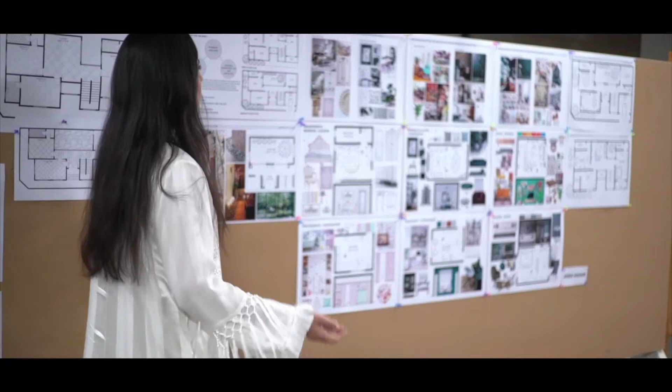My proposal for this conference is intended to be a contribution in the field of design education, practice and research by establishing the importance of adaptive reuse of city assets. The research was initially envisioned as part of a research project, then converted into an academic project and a studio project with students of interior design, architecture, and also practitioners from the field of research, design, and adaptive reuse. The proposal aims to establish the needs of adaptive reuse of city assets and cultural assets.

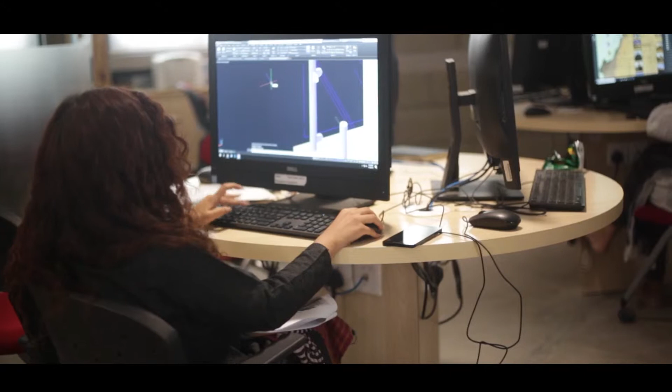This research was initiated as part of an academic exercise, then later converted into a studio project, a design intervention in which practitioners, adaptive reuse experts, students and future designers take part to complete this project. Now this proposal is in the second stage where we are involving the government and the city mayor to see this project as a potential revitalization project for the city of Karachi.

This research touches upon the potentials of adaptive reuse of historic city centers, and how the abundant stock of buildings can be refunctioned to save them from demolition and loss. Before going ahead with the research proposal and showing the kind of work we are doing, I would like the audience to see the rich context of Pakistan and the rich historic character of the city of Karachi.

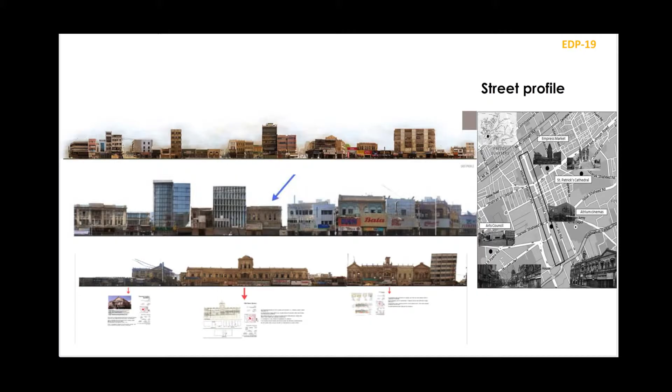Saddar Bazaar quarter defines the historic character of the city of Karachi, and the proposal street is also in the Saddar Bazaar quarter. It's known as Elphinstone Street, and locally known as Zaibunnisa Street. It's one of the most prominent marketplaces and shopping districts for Karachi, and it still retains its character.

Elphinstone Street is one of the oldest shopping districts in Saddar Quarters, Karachi, also known as Karachi's Piccadilly Circus. It is lined with historical colonial buildings from the British Raj era. In addition, consulates and hotels are also located on the street. It is one of the city's most vital arteries, spread across a kilometer, connecting it to M.A. Jinnah Road and Shahrah-e-Faisal.

Zaibunnisa Street has many old structures dating from the pre-independence British period, which are an important part of our city heritage. However, there is an enormous market pressure to tear down these historical structures due to financial and economic feasibility.

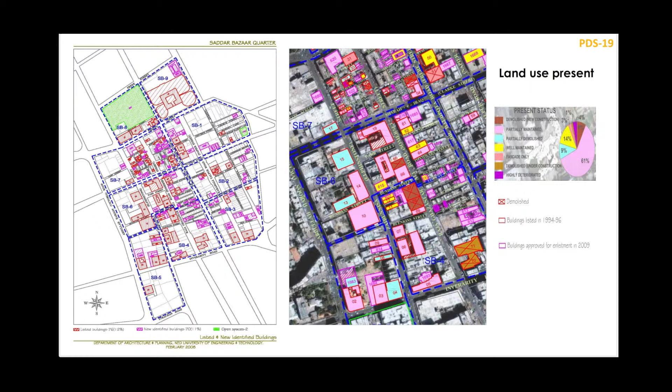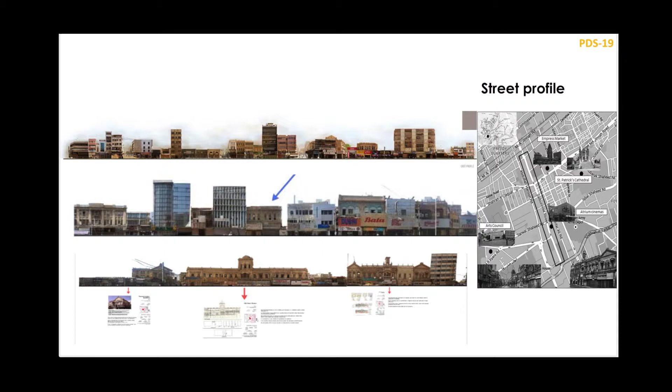Another reason the marketplace is losing its glory is the deteriorating condition of the heritage architecture. Secondly, with the shift in markets, many businesses also shifted to areas that seem to offer greater opportunities. Hence, Zaibunnisa Street and the main artery of Saddar Bazaar district found itself in the middle of an outmoded marketplace, where the shops that remain today cater only to a small niche in a wide array of products, services, and typologies that exist.

The Elphinstone Street project is envisioned to preserve the rich cultural assets of the city for future generations. It also deals with the adaptive use of historical cultural precinct and the utilization of abundant building stocks into functions and activities which can activate the historic precinct again.

The proposal is segmented into 2 parts. The first part will review the literature on adaptive use, contemporary theories, and case studies within the discipline of architecture and interior design. The second part will shed light on the studio methodology, how it was conceived and done, and the selected case study area and proposal of Elphinstone Street in detail.

The research is initiated as an investigative approach to review the historic core of Saddar, its importance in terms of the physical and economic aspects of the city.

The Adaptive Reuse Studio was envisioned as part of the interior design curriculum to bridge the gap between academia and practice, and to expose young designers to the heritage context of the city, enabling them to understand the complex nature of heritage buildings and the potentials of design intervention they offer, as well as training future designers to work in challenging and complex environments.

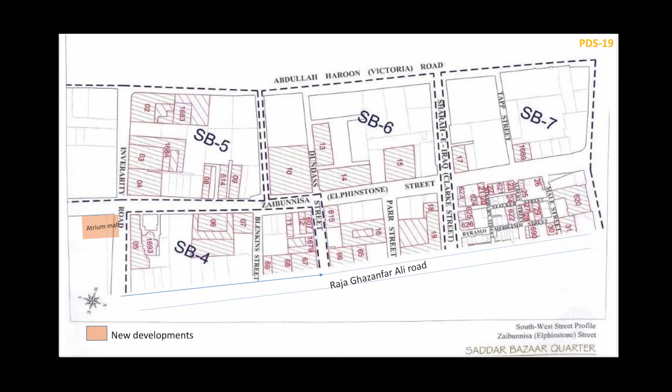The project aims to develop the conceptual and technical skills of students and enhance their exposure to working in a heritage precinct. Students were allotted a 0.5 kilometer stretch of Elphinstone Street to analyze the relationship of interior and exterior spaces within the urban context, and to propose a pedestrian street for recreation and commercial activity for the city.

The intervention was proposed keeping in mind the diversity of the city of Karachi.

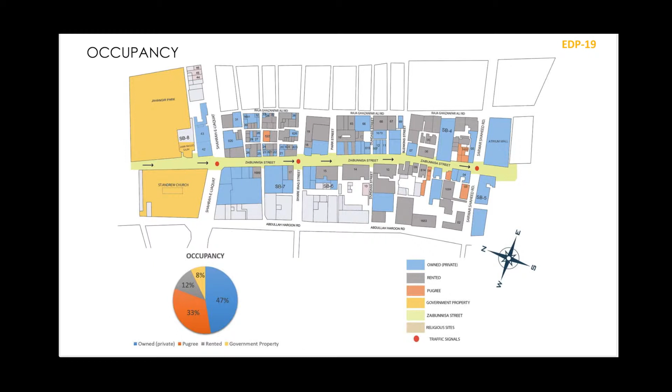The project was conceptualized in 4 stages, which includes research and documentation of Zaibunnisa Street and its old quarter to better understand the activity pattern, the potentials of the area, and the existing land use.

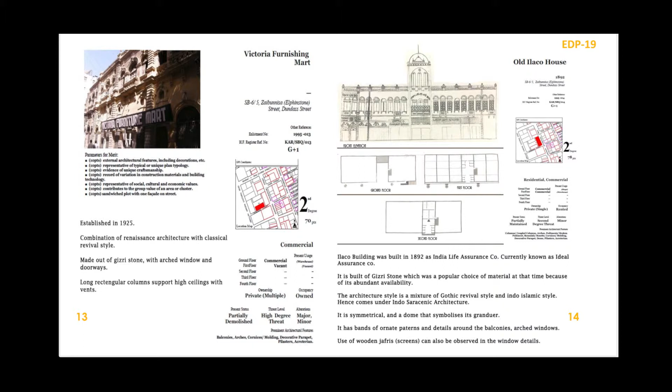After detailed research about the area, the process of documentation started with the help of existing research documents from the Heritage Department of NED University Department of Architecture and Planning, in which the status of buildings, their old use, and present situation was marked in detail.

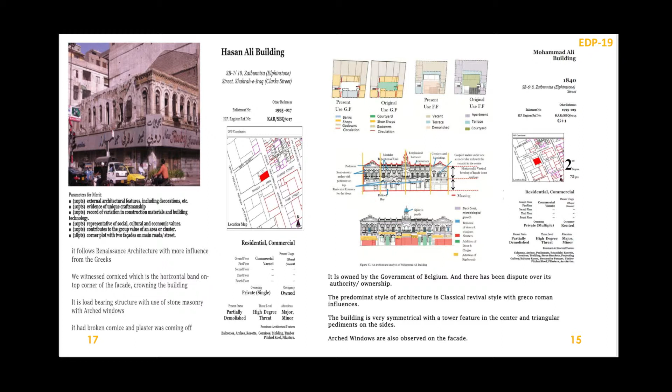As it was done in 2008, a detailed building documentation drive was done again in 2018 and 2019, which marked other details from the history and status of vacant, occupied, and demolished buildings.

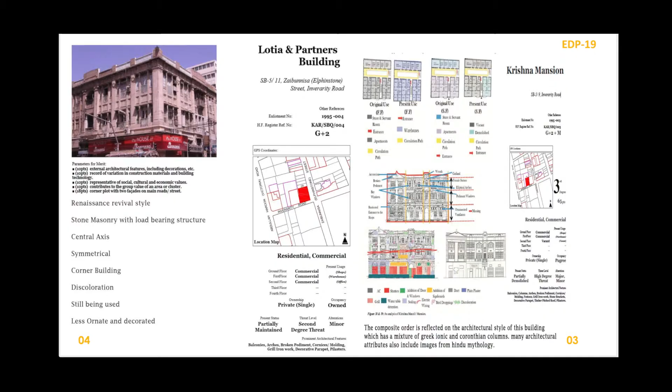Buildings were documented through various sources, and locals were interviewed about their views of the street and the area, and how it could be further improved.

Photographic surveys were done to identify the conditions of buildings in detail. The building plans and details were digitized with the help of photographic surveys, as many building floors were badly damaged and access to the internal spaces was nearly impossible.

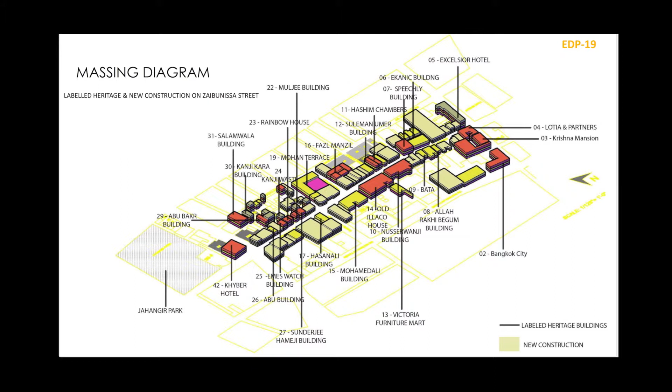The old and the new building street profile was done to understand the streetscape and how it can be further improved. The other important consideration was to move the clutter from the streets, like oversized signboards and encroached footpaths.

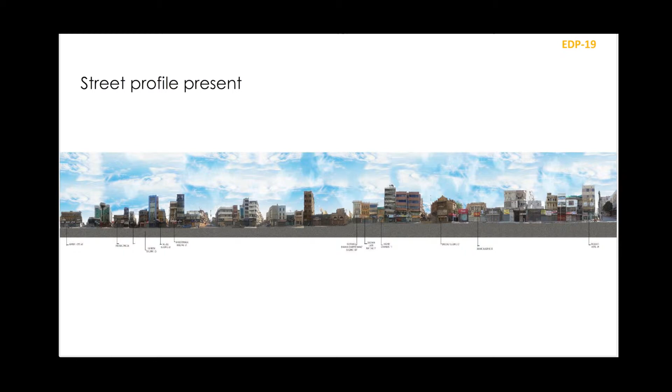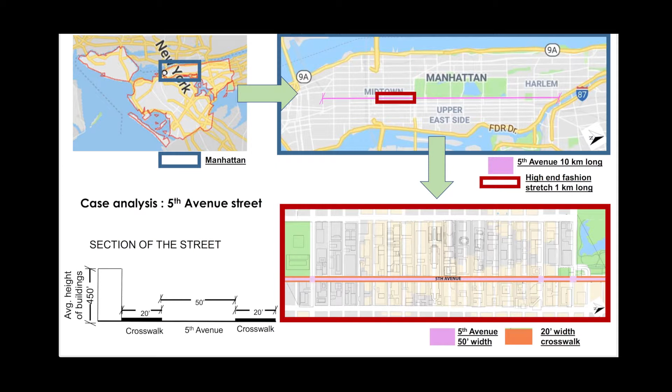After the project research and documentation, other fashion streets from the world were studied, like Oxford Street, Istiklal Street from Istanbul, and Fifth Avenue from New York, and many other streets, to see and study their pattern of development and how heritage buildings were reused as fashion brands and other related typologies to study their dynamic character.

The project focuses design intervention with the focus of commercial and hospitality design. The main idea is to enhance the visibility of the street and reclaim it as a fashion street, which houses major retail brands, food brands, public and entertainment zone.

The first phase of design was to develop a master plan of the street to identify the activity potential across the 0.5 kilometer stretch of Zaibunnisa Street and also the parallel streets like Clark Street, Brady Street, etc.

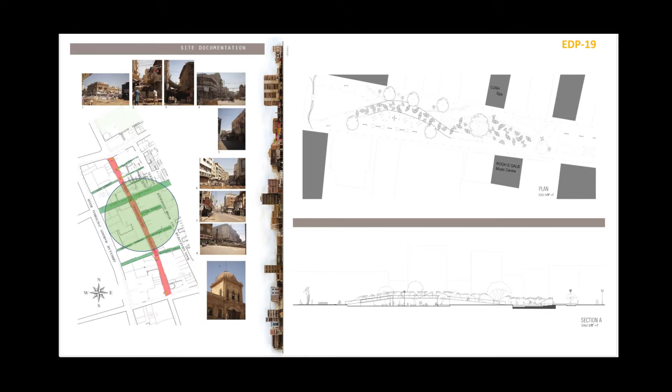The street already has an active food street parallel to it, so it was proposed that Zaibunnisa Street should be proposed as a fashion and entertainment zone for the city of Karachi.

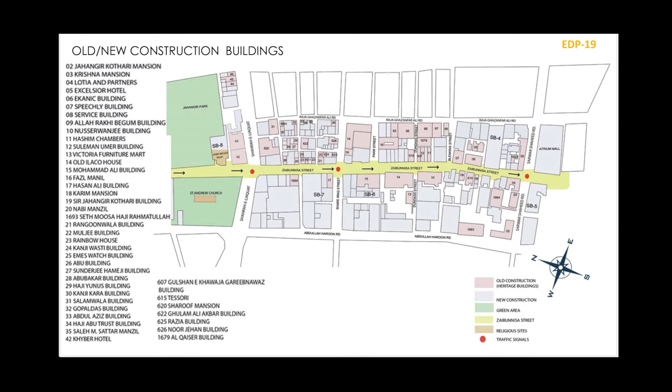After the detailed analysis of the street in terms of traffic routes, street furniture, landscape details, building heights, ratio of vacant and occupied buildings, phase 2 of design intervention focused on how individual buildings and the typology would be best suited. After a detailed analysis of building heritage value, design interventions were proposed for 2nd degree, 3rd degree and 4th degree heritage buildings.

Some of the proposals focus on reviving the existing crafts and culture of Pakistan and propose stores and outlets of Pakistani produce. Some projects focus on bringing in famous international brands of clothing, apparel, shoes, watches, and other related goods. Another important typology to keep the street active was to introduce entertainment activities.

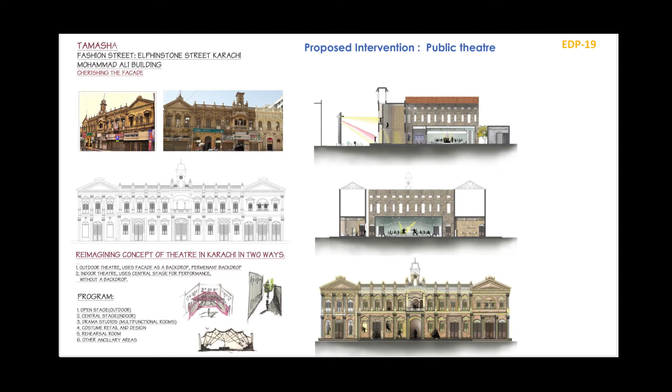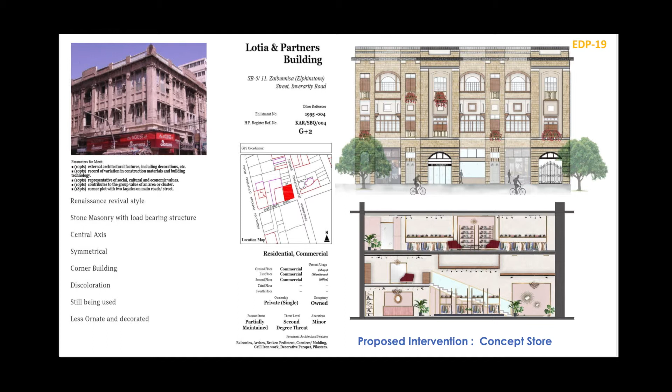Activities like street theatre, indoor theatre, music museum, poetry museum to restore the rich poetry traditions from Hala Sindh and other parts of Pakistan. Both indoor and outdoor street theatres were proposed to utilize the historic facade of Mohammad Ali building as a backdrop for a street theatre.

Designer boutiques such as famous designers from Pakistan and from the Indo-Pak region, like Bunto Kazmi bridal clothing store, were also proposed.

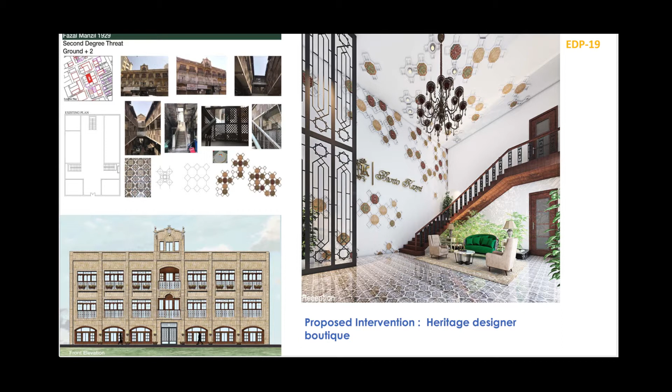A concept store was proposed at the Lotia building as a multi-brand store which focuses on products according to the seasons and festivities. Two spas and salons were proposed along the corridor which focus on sustainable and organic products, keeping the theme of the project alive.

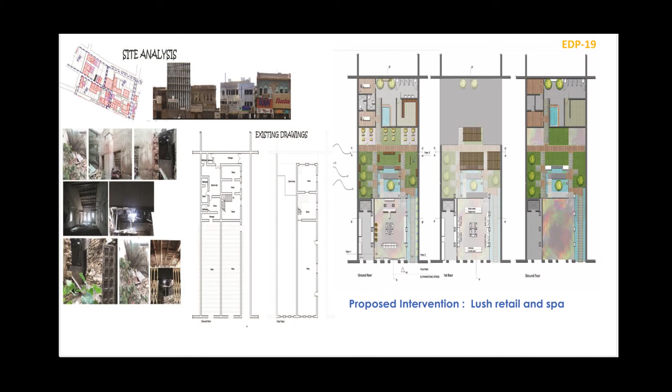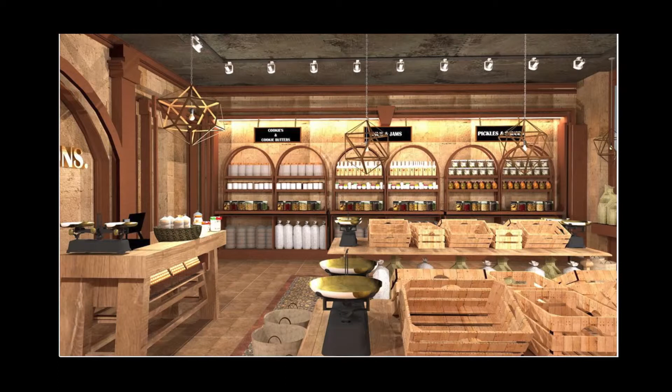Pakistan is well known for its arts, crafts and textiles, so retail for handmade carpets, shawls and other handmade products was also proposed. Pakistan is also famous for its fruits, dry fruits and produce, so a concept store for organic nuts, honey and other items was also proposed.

In buildings like Fazal Manzil and Old Ilaco House, different restaurants and other entertainment activities were proposed. The restaurant designs range across different cuisines; some focus on Pakistani street food, while other restaurants were designed as fusion restaurants promoting the rich context and culture of Pakistani cuisine.

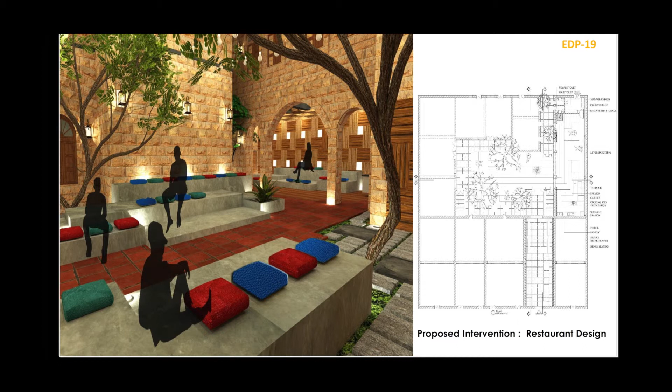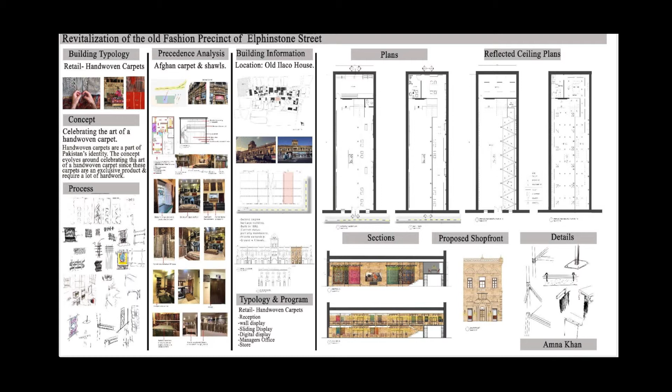In all the above proposals, the idea was to activate and reuse the interior envelope of the building, and the structure of the building was celebrated and restored to its original splendor. The main aim is to keep the heritage fabric alive and propose interventions that activate the historic precinct to its maximum potential.

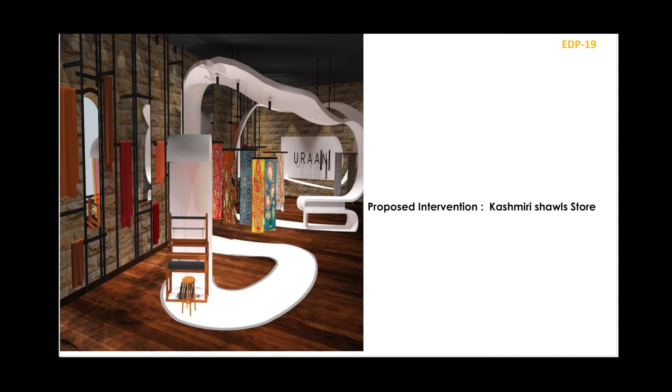Design education should embrace a new paradigm that values creative experience. It's not only the need of the time, but also the complexity of the nature of the design studio, that studio methodology should also value creative experience for students. It should indulge them in creative thinking and design-build projects.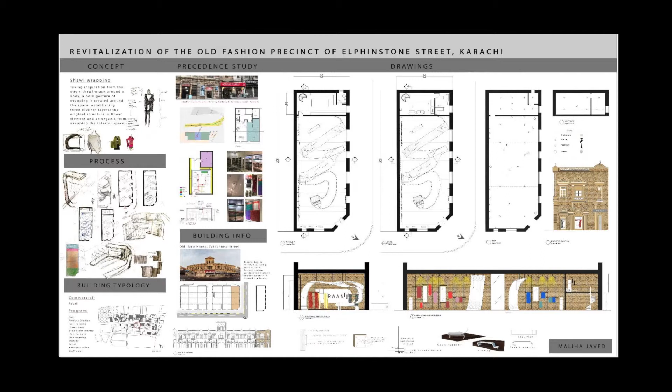The new era is bringing vast technological advancements with multiple challenges in the field of design. As the world of design is getting connected, complexities in design problems are increasing at a rapid scale. Today, designers are facing multiple challenges and complex working environments.

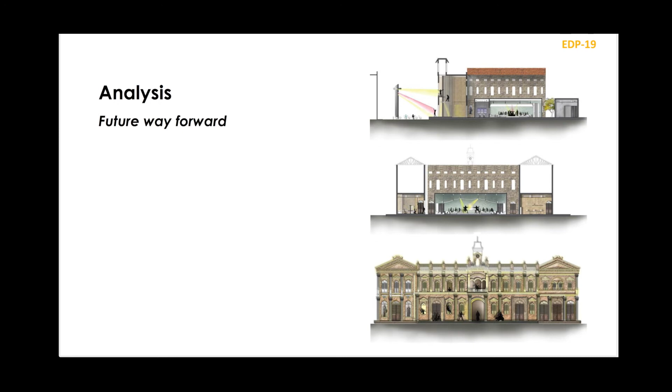Similarly, the discipline of design is living through extraordinary transformations, and interdisciplinary design pedagogy is one of the most imperative approaches from which one can create better opportunities and chances of success for future designers.